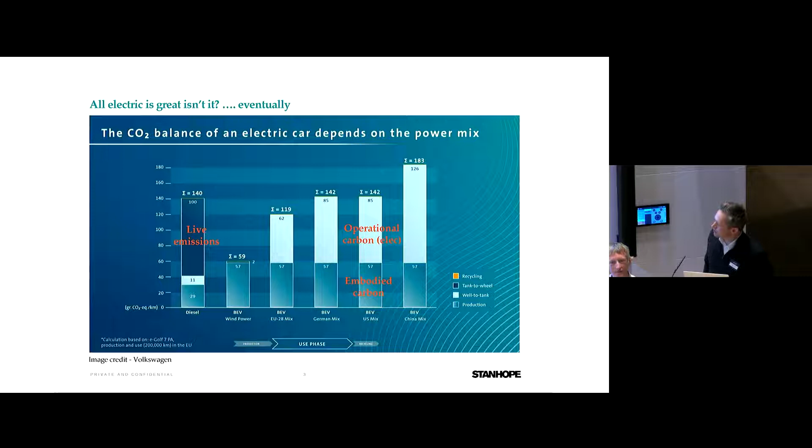The only vehicle doing really well is the electric car powered purely from wind power. All the cars powered by blends of fuel that create electricity really don't fare very well—they're generally comparable with the diesel car. But as you can see from the next graph, it takes an awfully long time until they break even.

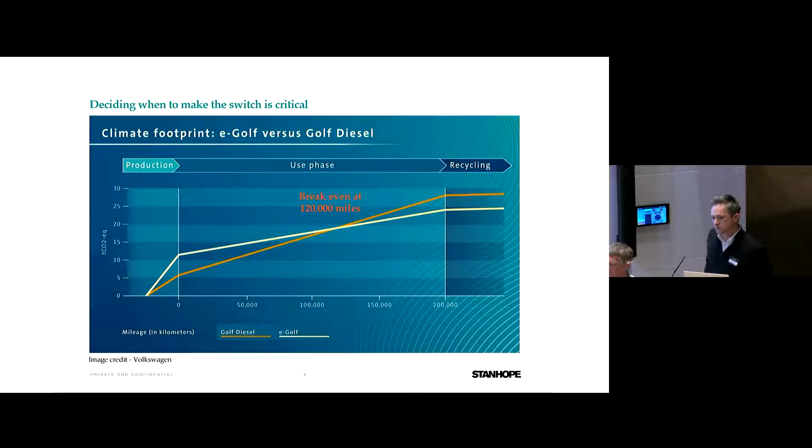I think we should really think about this when doing buildings, whether we're considering refurbishing or knocking down and building again. It's fantastic to be in buildings like this that are all electric with good REGO certificates behind them to buy renewable energy, but not everyone can do that. We have to work together as a community of designers and developers to develop processes and systems that aren't just for grade A office buildings.

So this was one example, a project I actually worked on with Arup. I'll rename it Nameless for client purposes, but this was comparing closed cavity facade systems with typical double glazed unit facade systems on a tall office building.

What these graphs show is that over their whole life, the closed cavity facade system—an integrated system with 3 layers of glass and integrated blinds to help with solar gain and so on—doesn't really perform a lot better than the double glazed unit. And when you consider that graph is based on the CCF being used all the time, with people not overriding it to get the view, it's a bit worrying.

So I think when we're looking at high-tech solutions, we really need to challenge ourselves about whether we're making the right decision.

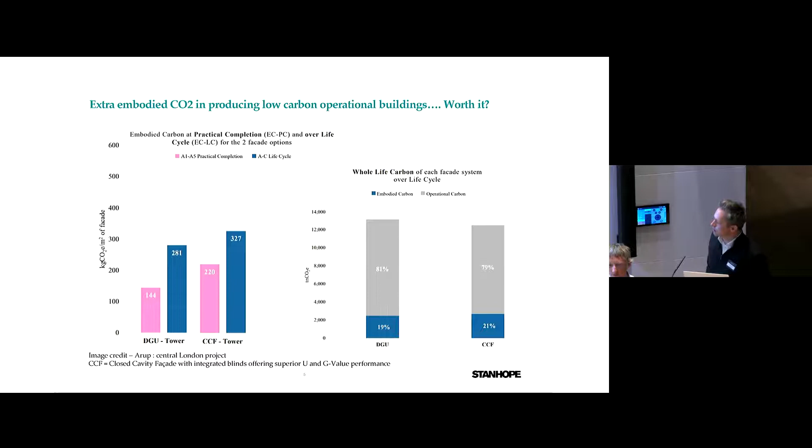You're nothing in the net zero world without really getting on top of your data and being transparent about it, and telling everybody what you're doing. I think there's an awful lot of labelling of net zero schemes. They're all going to have to come clean at some point in what their actual performance is telling us. So I think we're very cautious at Stanhope about marketing buildings as net zero before they've proved themselves in use.

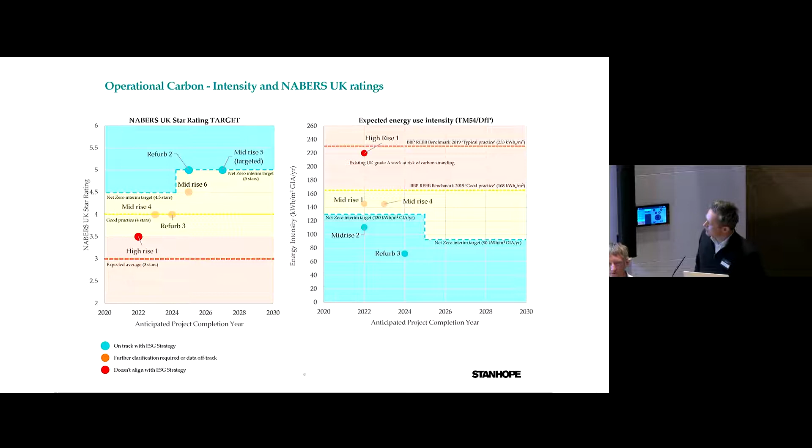We're, as many of you are, involved in NABERS Pioneer schemes, the accreditation system we're importing from Australia to show performance in use. You can see that new build, mid-rise buildings fare well on energy use. Refurbs, it's more challenging, and high-rise is, as ever, very difficult. Similarly, on our embodied carbon performance, high-rise is very challenging. Refurbs are your get-out-of-jail card on a portfolio basis.

And so I think that's the privilege, I suppose, developers who have lots of projects have, is that we can argue our net zero pathways on a portfolio basis. Again, not everyone can do that.

So we are looking hard at science-based targets. We've been looking hard at it for about 4 years. And I know that some of the other developers in the room are already signed up to it, and congratulate them on that. I think where we're struggling with it a little bit, to be open and honest with everyone, is that our pipeline fluctuates. Our office emissions of our actual business, if you were very strict about science-based targets, are very, very small. They're less than 1% of our footprint.

But because we work with a lot of different shareholders and investors, our pipeline is, fortunately, very large, and we have therefore a huge responsibility to manage and declare that carbon footprint. And so I hope you'll see that I'm talking from the micro to the macro here, that the opportunities around net zero carbon and challenges for us are managing the whole ecosystem.

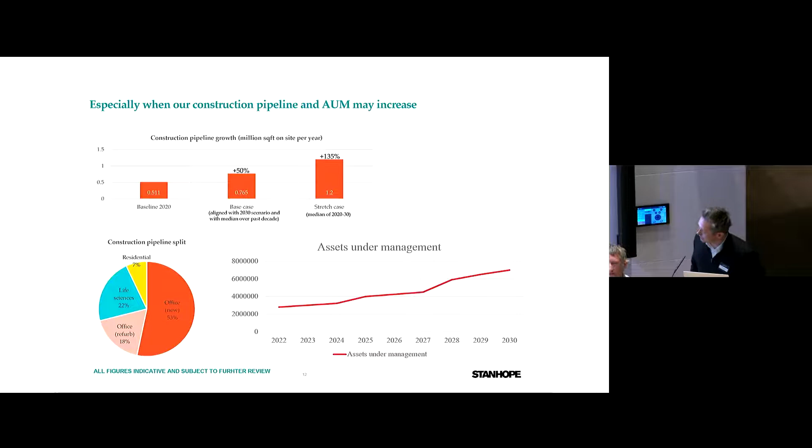So I'll just close with this slide, and I think it relates to this point about whether it's correct that every single company needs to absolutely reduce its emissions. I think one of the issues we've got is that the gulf between the Committee on Climate Change reports and what we're doing at building level is massive. I don't know how many people here have tried to open and read one of these Committee on Climate Change reports, but they are some distance from the practicalities of delivering a building.

But I think the good news is, as I'm told, the UK GBC carbon pathway for the industry should help us begin to bridge that gap.

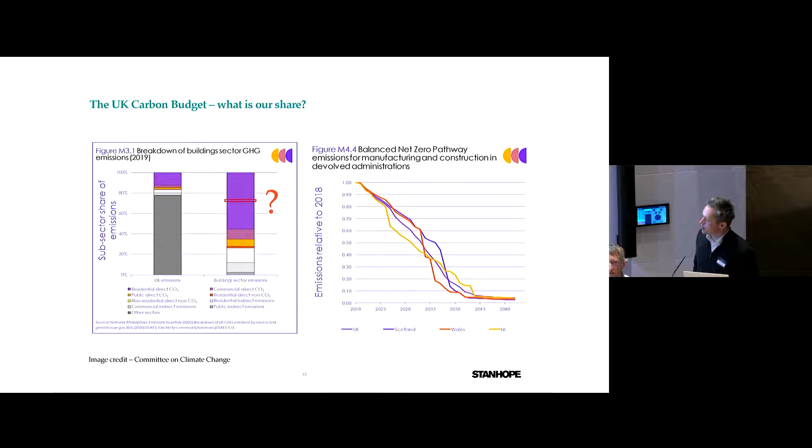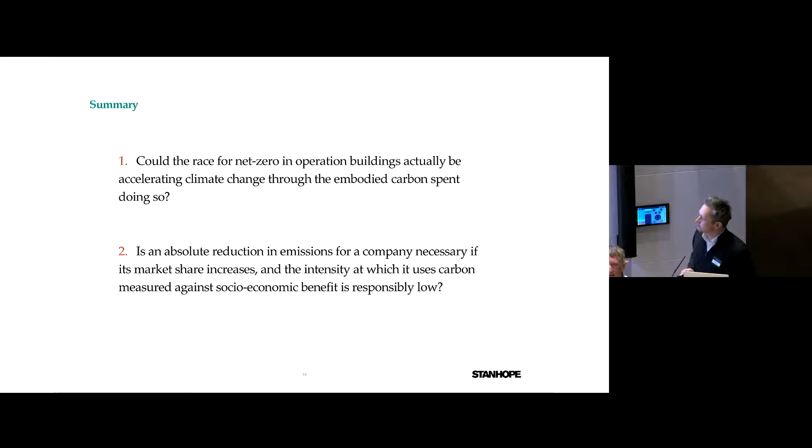I think that's me. So just closing, going back to my original anxieties and the electric cars: is there a danger that in procuring and buying all these net zero in operation buildings we're actually accelerating climate change through the additional purchase of aluminium, openable windows and heat pumps? And do we absolutely need to reduce emissions for every single company if the share of the market that company is taking is increasing and they're doing it responsibly?

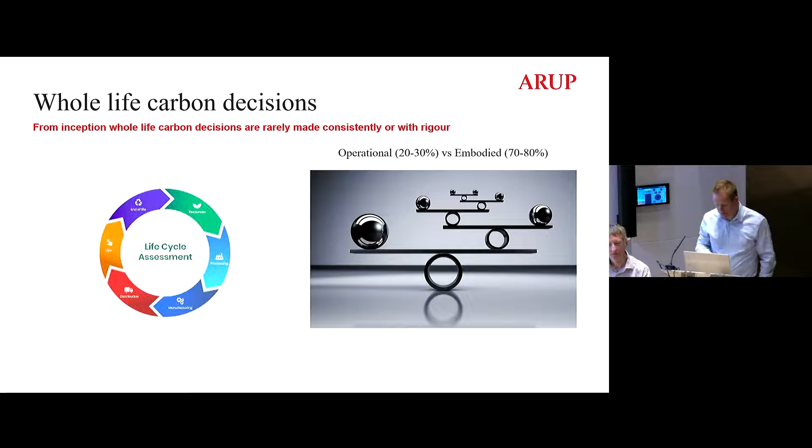If I now focus on the embodied carbon side of things, this is a fairly simple stepped approach, which I think you'll have seen. Often people use different words, but in principle, if you want to reduce your embodied carbon, you reuse stuff, you use less material, and then you specify well. That seems quite apparent, quite obvious.

But what I'm seeing frequently is an argument around this, and I don't really understand why we need to be arguing about it, but there's an argument about how much we can reuse or what we should be reusing. There's frequently different advice out there in the market around, well, do we need to use less material? If we use more timber and certain sequestration figures, then surely it gives us a better embodied carbon answer. If we use hydroelectric steel, it doesn't matter how much steel we use, so therefore let's not worry about using less steel. I don't agree with those. I think you have to stick with that hierarchy and approach your way through it.

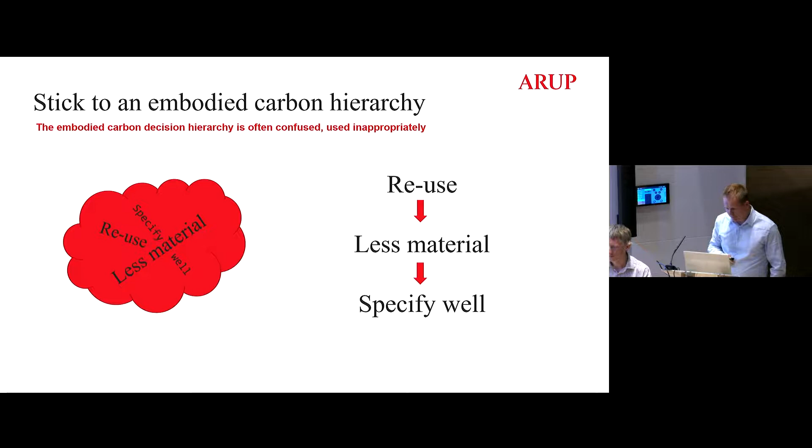In terms of the reuse side of this, I think it's pretty clear to me, and I'm not arguing with Adam's science-based targets point, but we need to take a little bit of the emotion out of the discussion. And I'm bound to say this as an engineer, but I think these need to be evidence-based decisions. That doesn't mean we ignore people in the evidence-based decisions, but we should be looking at the numbers, and we should be using that to guide what we do. And I think the industry has started to heavily politicise the decisions that we make. If you take the evidence out of it, perhaps we'll make some incorrect decisions.

Just a couple of examples on the slide of the benefits of reuse, but also thinking about it by elements. So sometimes we just dramatically swing from reuse to new build, but often there's interim measures - partial refurb, elemental refurb. So 1FA, which was an original Arup Associates building, the new refurbishment of that, 90% of the central plant has been reused. And Triton, the new scheme just delivered north of Euston Road, the facade has been repurposed, recycled and replaced back on that building. So we don't necessarily have to swing and politicise dramatically between one or the other. We can use an elemental approach.

This is, for me, basics. If we're going to use less, then we need to know what we're trying to achieve. We need to have a carbon budget. In having a carbon budget, then it's good to understand by elements on the building how much makes up the embodied carbon totals. Is it roughly 45% of the building which is sub and superstructure, and 20% or so that's facade? And if you start to get those kind of metrics in place, you can make some informed early decisions. And that's an approach that I think we should be putting in place on all of our projects.

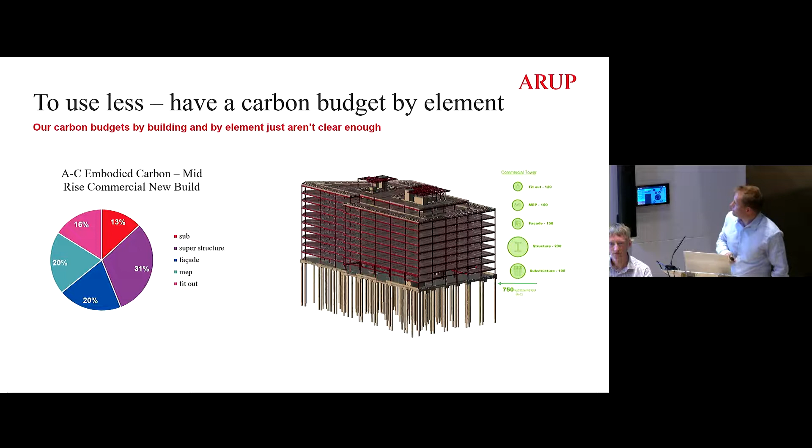To use less is really clear to me. You've got to influence the early decisions. And this is 8 Bishopsgate, one of Shin's buildings, who's in the room with us today.

One of the interesting things about this building, the diagram you see in the middle is an early concept diagram for the scheme. Working with Wilkinson Eyre and the team, we changed the way the facade was put together. It sits within the same rights of light envelope, the same planning requirements, but the wall to floor ratio shifted from 0.6 to 0.48 through that early decision making. That's about 5% of the overall building's embodied carbon.

So just having a chance to play with the massing of the building, make some influential decisions, makes a really big deal. The building you're in now has around 0.35 as a wall to floor ratio if you include the atria. That gives you an indication that you're playing with around 10% of your embodied carbon just by looking at your wall to floor ratio.

And Steve Watts is also in the room. I'm sure he'd support that there might also be some cost metrics which are helpful to go alongside that decision around wall to floor ratio.

Again, to use less, work the carbon budget. Once you've got that budget, work it hard. So if you look at the column grids, this building is a 7.5 by 9 grid. I wonder if many of you noticed that when you came in.

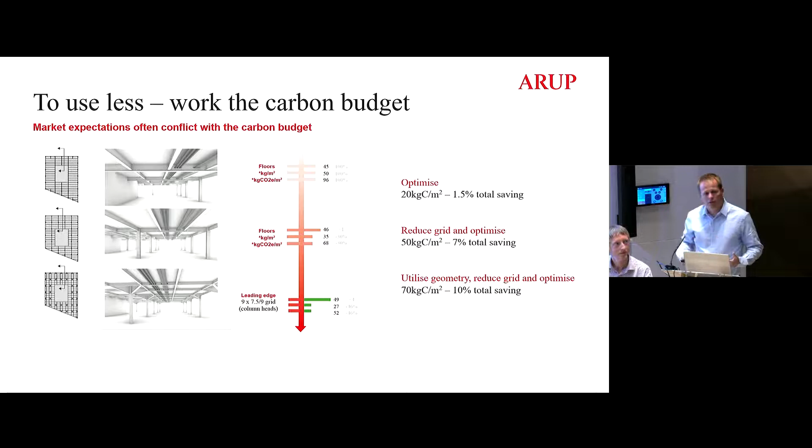And I find buildings like this quite useful to have a real life example. You can go and walk around BCG's fit out, see how they fitted out the space. You can see how Arup have fitted out the space. You can see the kind of range of flexibility that people have within those solutions. But you can only start to convince people, I think, when you see stuff in real life.

So then moving on to the next step in the process is specify well. And I think for this was something we've recently done on a scheme, and it's about considering the column options. This was a real surprise to me, and I've deliberately put this up there because this didn't match my initial assumption.

So what we did is we looked at a tall building and we looked at what all of the different embodied carbon comparators were for different vertical load carrying solutions, different columns on the building. And if you look to the right, some steel reinforced concrete columns are actually showing us that they're the lowest overall embodied carbon for that building. It was around an 8% saving on the overall embodied carbon budget.

But if you step back from that, you think steel with concrete, they're quite chunky. Is that going to be the lowest embodied carbon solution? I didn't realise, and it was only when we put the evidence to it and explored the options that we came up with that as a solution. So I think that testing yourself and considering the options and exploring is absolutely crucial.

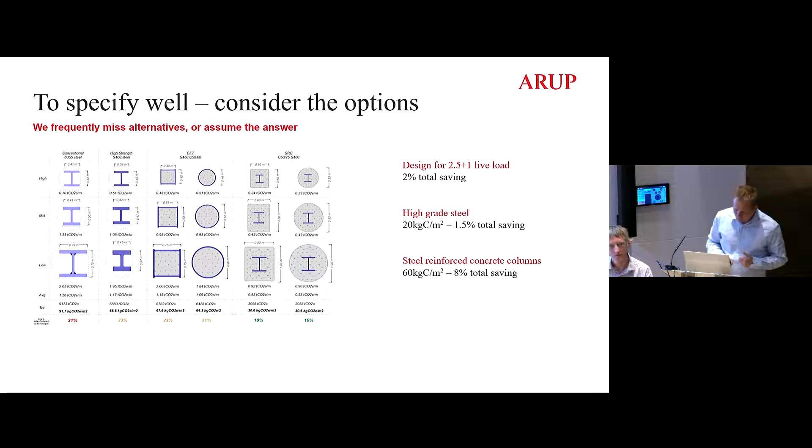And then linking the elemental impacts. I don't think it'd be a surprise to you as someone working for Arup that I'm going to say linking multidisciplinary design is a good thing. But this is not a company point, it's a general point about the industry. When we are designing, we tend to get passionate about our own area, and I think a holistic embodied carbon approach makes us think about others and encourages us to think about others.

So when we're putting a facade on a building, there's a couple of examples up there, but the range is from 0.7 kilonewtons a metre squared load on the facades on the left, up to 3 kilonewtons facade load on the right. That's a big difference in terms of the loads on the foundations, the embodied carbon for the structure. So just thinking about the other disciplines and the impact we're having on each other is absolutely crucial.

The diagram on the right is just an example. Just think, we all love greenery on buildings, we love terraces, we love the fact that people need to enjoy the spaces they're in. There's no point in doing what we do if they don't. But actually we can do simple things.

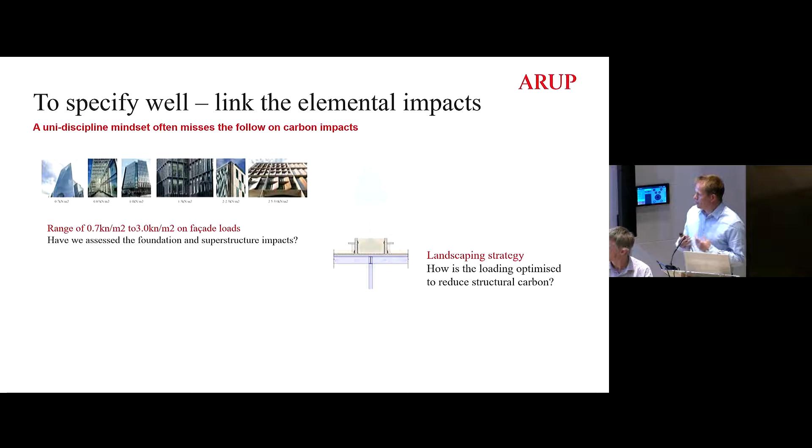We can optimise landscaping strategies so that it comes above columns. We can do stuff where we kind of keep the weight down. So just linking those elemental impacts is absolutely crucial.

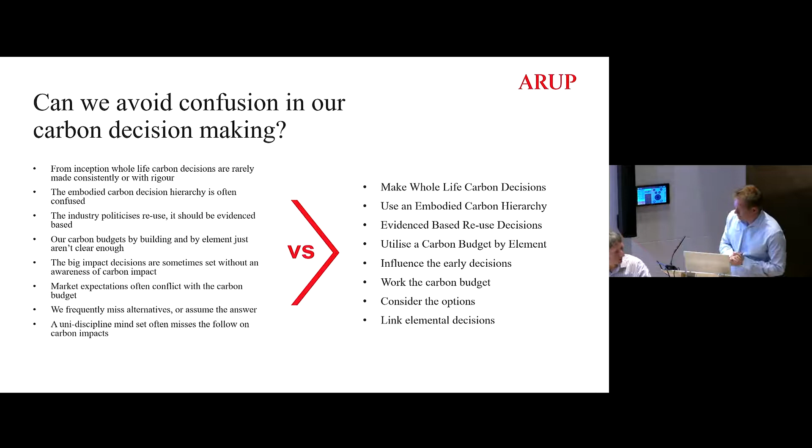I think it always reminds me, listening to Jeremy and others as well, how much we're in the infancy in terms of actually working out how we really embed carbon decision making in our projects. We've been optimising this for the last couple of years, trying to undo 30 years worth of more conventional, you might say, thinking.

Fascinating, Lorna, thank you. Obviously we'd like to reiterate what everyone else has said about how brilliant it is to be in person, and also wonderful to see so many familiar, friendly, I hope, faces. So my provocation is, in order to achieve net zero, we need a flexible approach to our heritage assets.

To put in figures, obviously heritage is a really important feature of our built environment. Everyone loves heritage buildings, but just to give some statistics in terms of how important all of this is. Starting on the right hand side, obviously heritage is hugely important to our economy. Millions and millions of visitors every year, billions to the economy, and it supports a huge number of jobs.

In terms of listed buildings, we have 500,000 in the UK alone, which represents 2% of stock. Most importantly, there's a lot of old buildings built pre-1919, which is a key date in terms of when methods of construction changed, and a huge amount of buildings also located in a huge number of conservation areas. Pre-1919 is also very relevant for domestic stock.

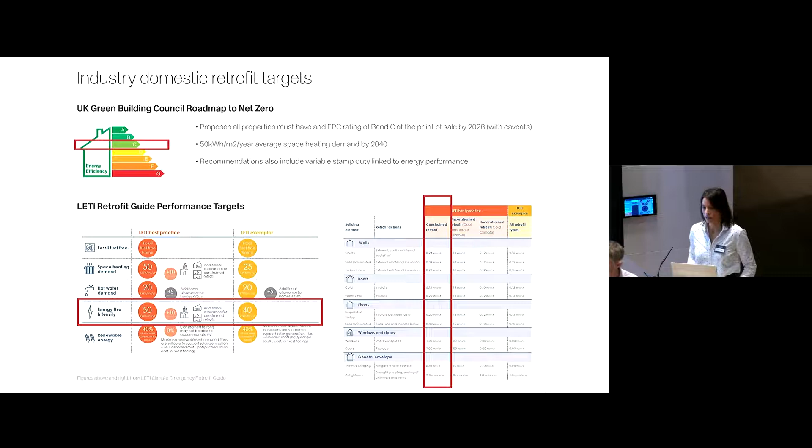Looking at these examples highlighted for a typical terraced house in terms of the energy performance we should be looking at, that's 50 kilowatt hours for energy use intensity per year per metre squared, and that comes with a really stringent set of U values that you have to meet. So this all sounds good.

However, the really big challenge is the policy is really, really inconsistent. The work I've been doing at RSHP in terms of projects would lead me to believe that this is fine, we can do it, because the council is really supportive.

Work that we've done at Hammersmith Civic Campus in Fulham and also at the British Museum, the council were really supportive of any fabric upgrades to help our energy performance, and you get a lot of interaction with Historic England and with case officers.

However, when you move to a smaller scale, which is perhaps the bigger problem, you don't get as much interface with case officers and you probably get a more junior case officer. So this leads to a very, very conservative approach.

It's obviously important that we protect the heritage, and there is a reason why people are cautious, because often historic buildings are non-standard materials, very different to each other, and designed to breathe. But we need to do something.

This also obviously applies to later typologies of buildings that are designed to be adaptable and may need to be adapted in the future. So moving on to the case study - I'm not showing this as an example of my wonderful design skills, far from it. I'm using it to illustrate a challenge.

We live in Southwark, in a domestic house. It's a grade 2 listed Georgian townhouse, 200 years old, representative of quite a common typology in London. My husband's also an architect, so we went into this with our eyes open - we knew what we were taking on. We bought it with EPC Band D, that was clear.

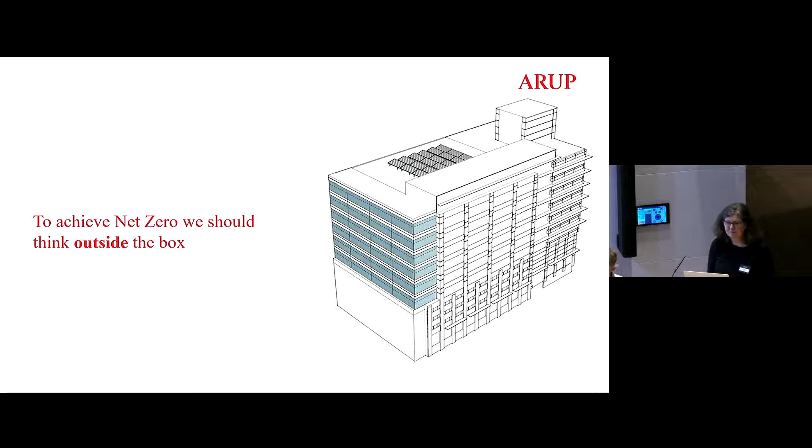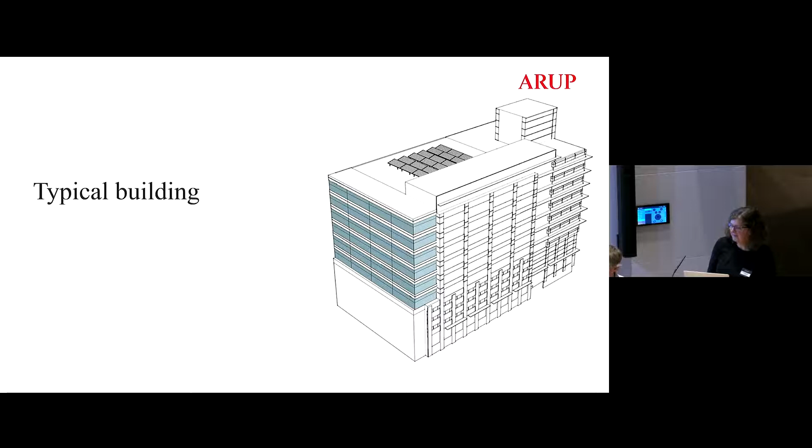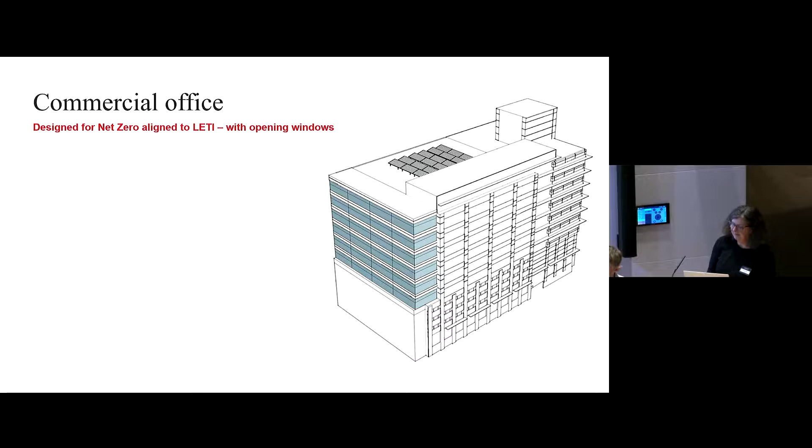How do we apply this theory now? This is a typical building fitted out with all the usual energy reducing measures - shading, PVs on the roof, that kind of stuff. But what if it was a LETI-aligned commercial office building, mixed mode, with air source heat pumps providing heating and limited cooling? This could be the default usage for the life of the building. To achieve the envelope performance needed, this is probably a new build or a building that's just had a significant refurbishment. The operational and embodied carbon for this building, designed well, would be aligned to net zero.

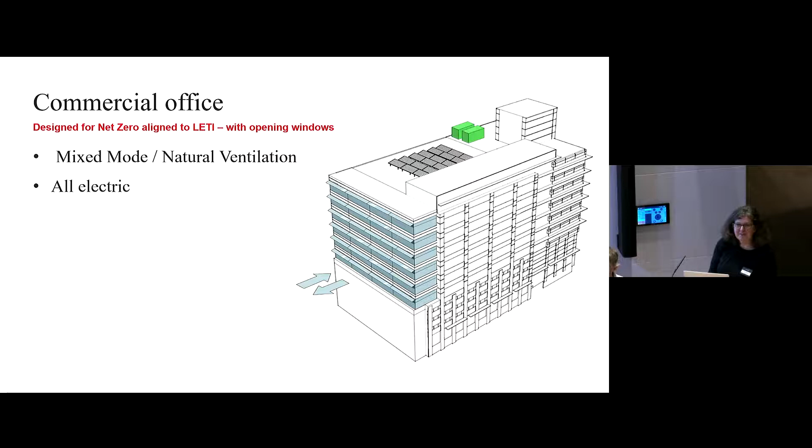So why aren't all our new buildings like this? Because they're not.

So the market can be a barrier at the moment to providing net zero office space. Tenants want to lease net zero buildings, or they say they do, and a lot of them have made commitments to do so. But the impact of lower small power provision is not translating yet to BCO or developer briefs, not yet. It isn't necessarily even translating to the tenant briefs, despite the fact they've told us they want a net zero building.

Small power is a whole discussion on its own. I won't go into that, we'd be here all day, and I don't know the answers. But it hasn't been helped by the lack of measured small power usage evidence over the last couple of years while we've had COVID, which has been a time of transition in how we use our IT, whether we're thin clients, as well as the move to laptops, etc.

Ian's looking interested. I'll grab you afterwards, Ian.

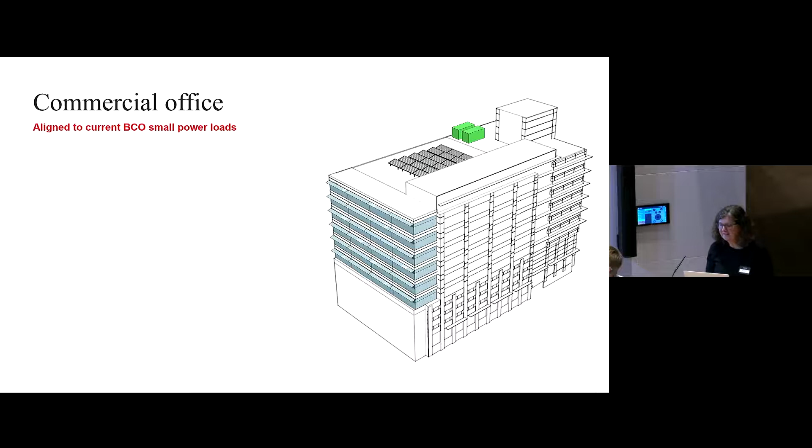A typical building designed to BCO brief is therefore likely to require mechanical cooling and ventilation, certainly for part of the year. A plug-and-play approach can support this increase only if it's needed. In other words, should we be allowing for this adaptability on the first day, or should we only add what we need when we know we need it? Do we wait? Do we be brave?

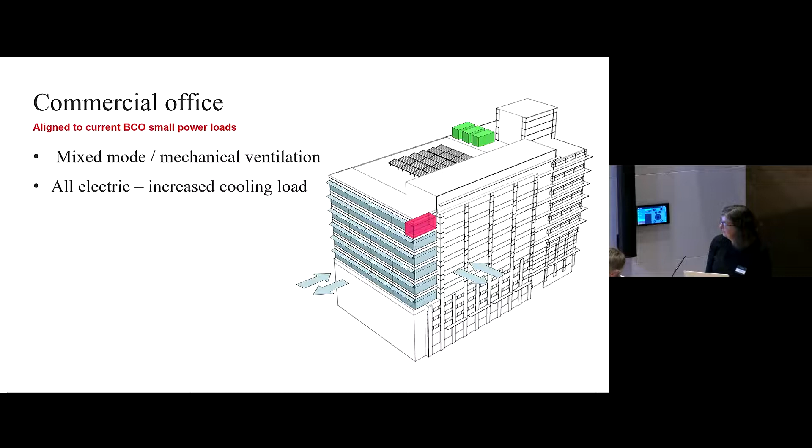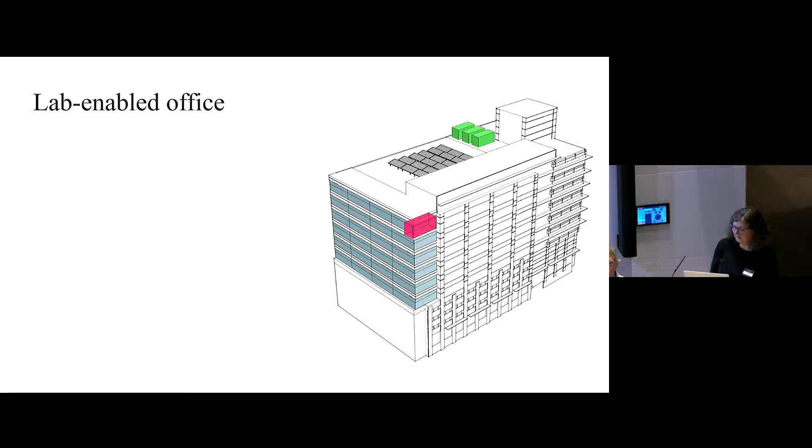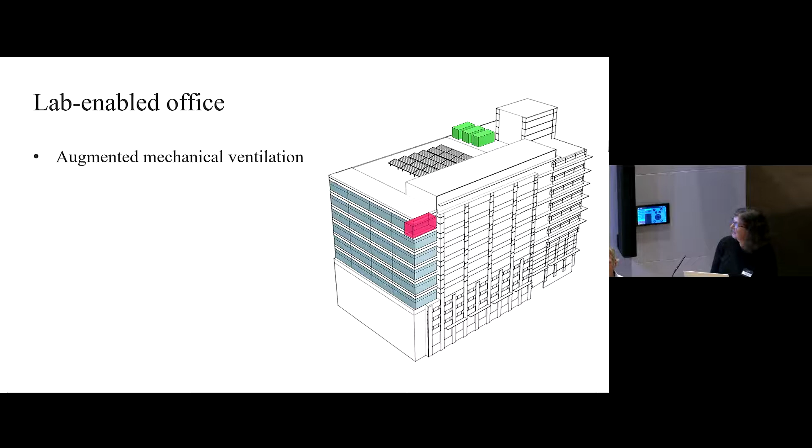But there are other things that this building chassis could do. Laboratories have demonstrated their importance and value in recent years, and careful and considered design allows certain laboratory types to be accommodated in many commercial buildings. Floor-to-floor heights, vibration and servicing require careful thought to limit the embodied carbon impact of building for science. But carefully considering which areas to enable and using an adaptive plug-and-play solution can result in another building use, extending that chassis life, which is a good thing.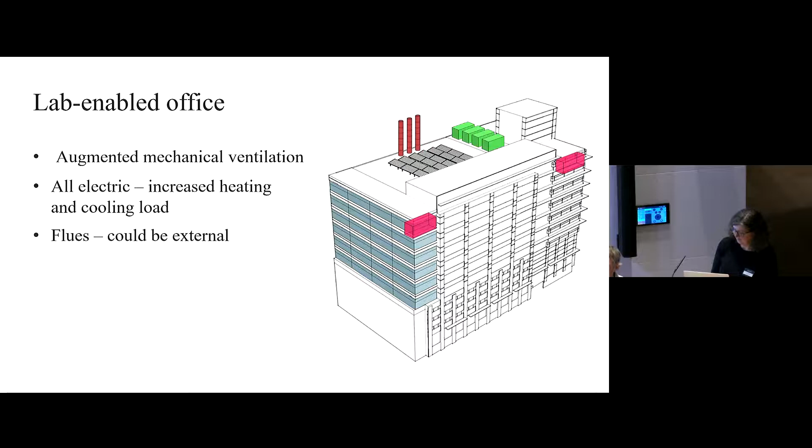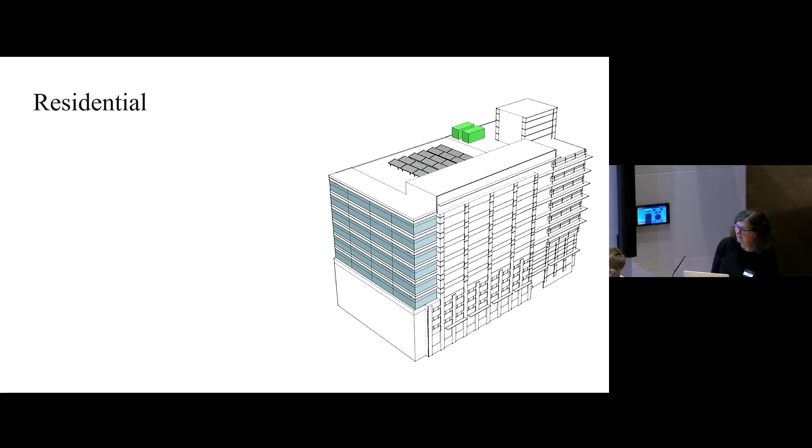And maybe in the future, there will be a shift to converting from commercial to residential. Again, adaptive plug-and-play approaches can allow this, and of course this approach is not restricted to new build. Here's an example of an adaptive outside-the-box addition to an existing building to support a change of use. But as I showed earlier, this approach is not new.

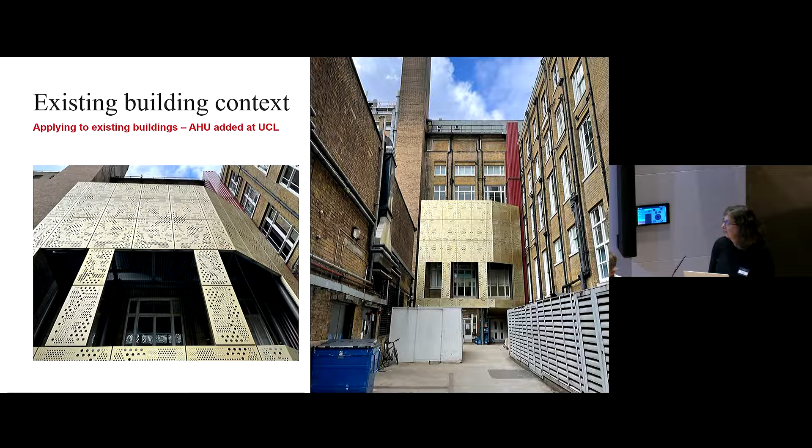That's me done. Thank you very much, Anne.

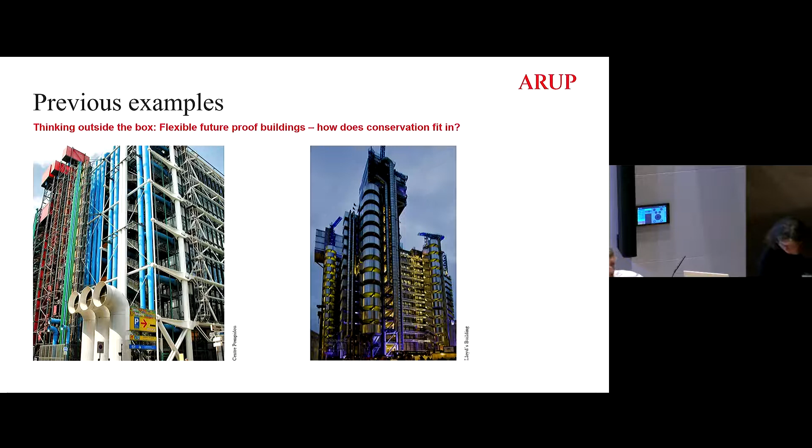So this one was anonymous, but somebody asked in the chat, is the EPC fit for purpose? And I might just expand that slightly. To what extent do we think the way that we measure the performance of buildings, or the way that the industry defines the expectations for performance, are holding us back? How much do we need to go around unpicking the standards that we measure our buildings by?

Okay, I'll start on that. So it needs to be overhauled, is my personal view. I think in terms of how accurate they are is very much under debate. I think there's been some analysis that shows that up to 60% of them can be pretty wrong. And also, in terms of the complexity of what you're measuring, it's really hard to actually, everything needs to be evidence and data-based. It's really hard to actually get the data that you need to make it a meaningful analysis.

I'm going to pick up on that. I agree, that's the first thing. I do agree, we do need to overhaul them. I was told off by someone in Arup, who's in this room actually, when I said they're rubbish, they don't do what they're supposed to be doing. And I was reminded that actually they have been doing what they've been supposed to be doing for a long time. We've kind of managed to, using EPCs, to get our energy down to a point where it's now a useless measure, because we're at the pointy end, the difficult and sharp end, where every little thing needs to be measured quite carefully to see what its effect on the actual building performance should be. So now is the time to overhaul.